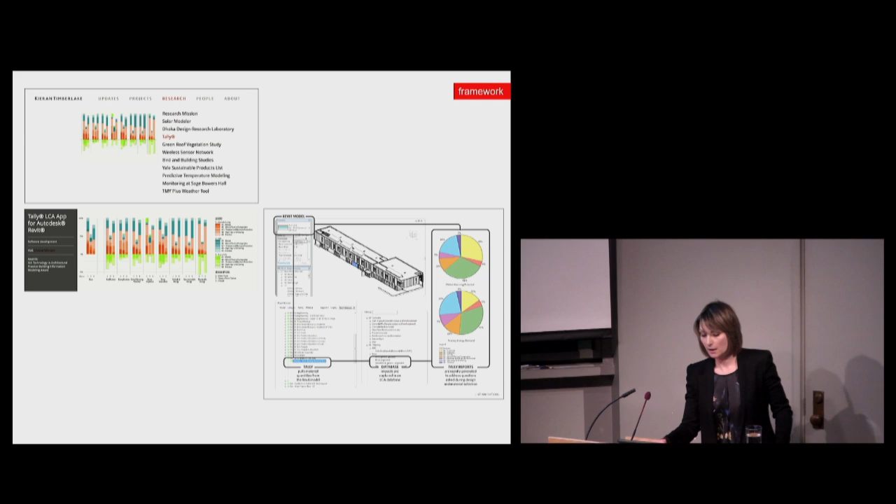And these are the kind of questions that they are taking on as a professional practice, in which, for example, they've designed a life cycle assessment tool titled Tally, which quantifies embodied energy along with other environmental impacts and emissions to land, air, and water. And with a number of scientists and ecologists on staff, the office also revisits many of their constructed projects to document plant succession and compare the original plant composition and how it has evolved and changed over time.

Other projects that I've looked at, for instance, at UBC, which have a campus-wide sustainability mandate, look at interdepartmental research collaboratives with partnerships across private and public sectors to monitor environmental performance, with a physical building functioning as a living lab to test environmental and social performance in situ. And mind you, this building has integrated about 3,000 sensors in it.

So for instance, one of the research areas among several others is intended to characterize the pervasive difference between design intention and actual performance with high-performance sustainable buildings. And within each research area, an interdisciplinary team brings a range of perspectives to assessing complex systems.

So as the architectural disciplines embrace more evidence-based strategies, I believe that design professionals and academics now have the responsibility to engage in performative research and to contribute directly to the development and optimization of environmental technologies. We need to focus particularly on how these new technologies actually work and how they inform the design process.

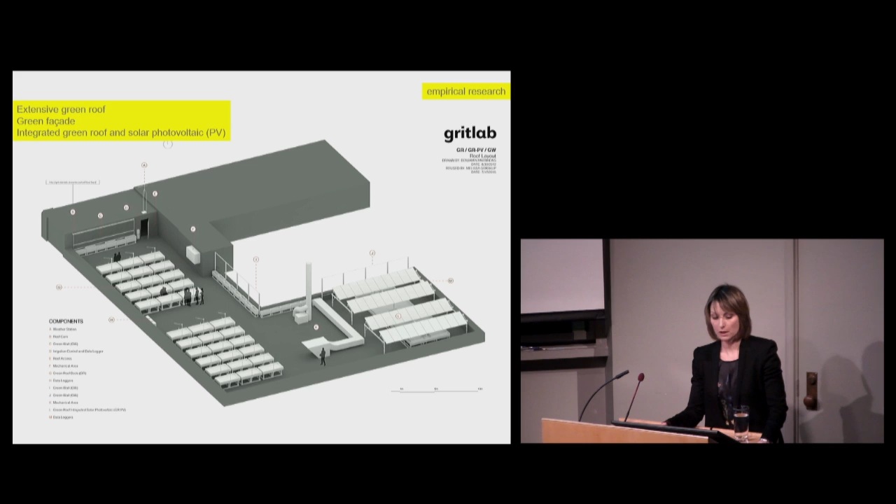Our current setup is actually on the 5th floor of this building. It includes an extensive green roof research, 33 test beds, a green facade research, and also an integrated green roof and solar photovoltaic experiment. The extensive green roof research began in 2011 and looks at 4 performance criteria. We're looking at stormwater management, thermal cooling, plant growth biodiversity, and species habitat.

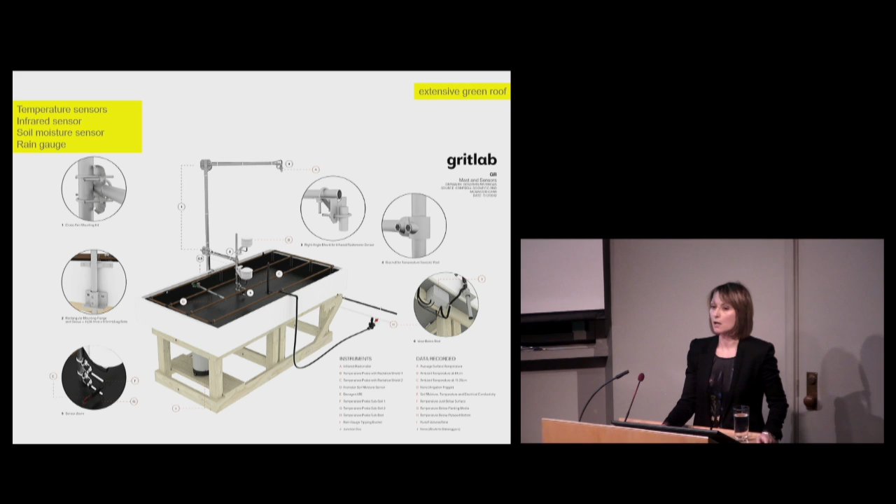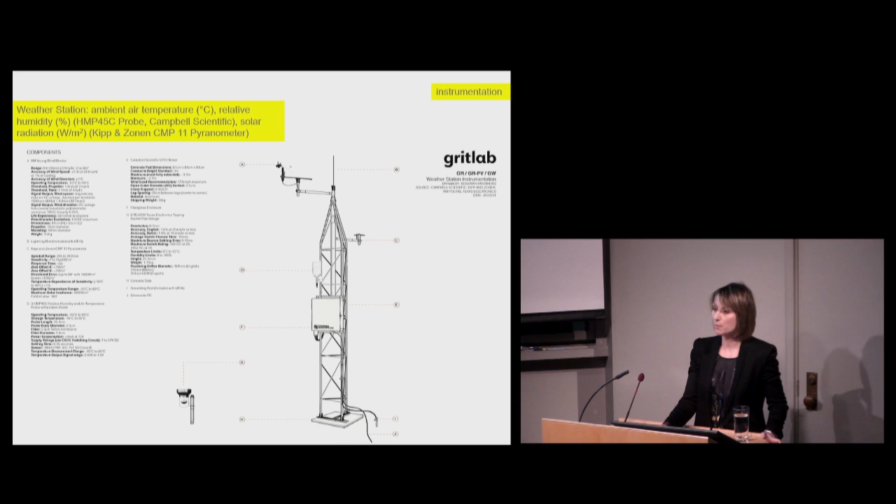Each bed is equipped with a number of different sensors that could measure temperature, soil moisture, and runoff. And the results from each bed are then compared to climate conditions that we record via the weather station: solar, precipitation, humidity, wind speed, and so on.

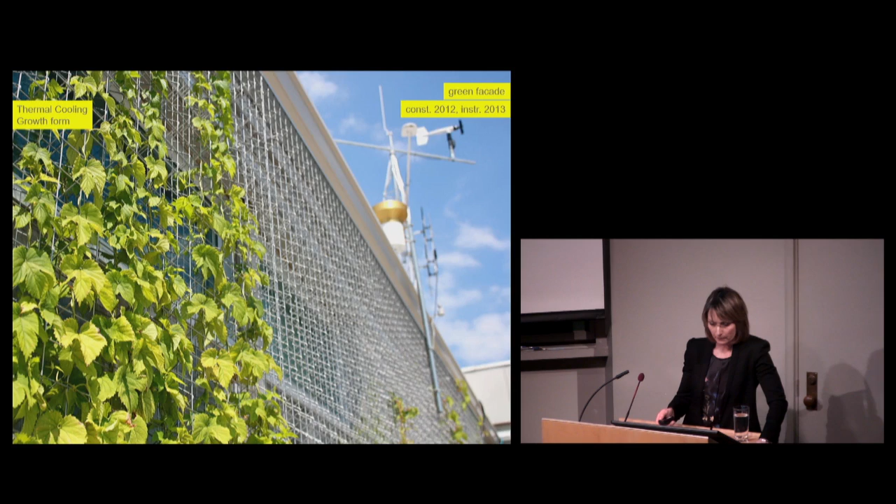The next research area that we focus on is green facades, and in particular, we look at the thermal cooling potential of green facades on building envelopes. And actually, here you can see our weather station. And in this picture, you can see the surface temperature sensors that are mounted to the surface of the building, comparing vegetated surfaces and control non-vegetated surfaces, and looking at the thermal cooling potential of vining plants on the facade.

And our most recent setup looks at the combination of green roofs and solar photovoltaics, with the questions about the effect of temperature and cooling via plants and evapotranspiration on energy production. We also are looking at the effects of shading on plant growth and the combination of energy and stormwater management,

thus providing a new research or implementation potential in the field, looking at 2 industries that are currently competing for the same roof area, and looking at whether they have the potential to actually be combined together and work in synergy.

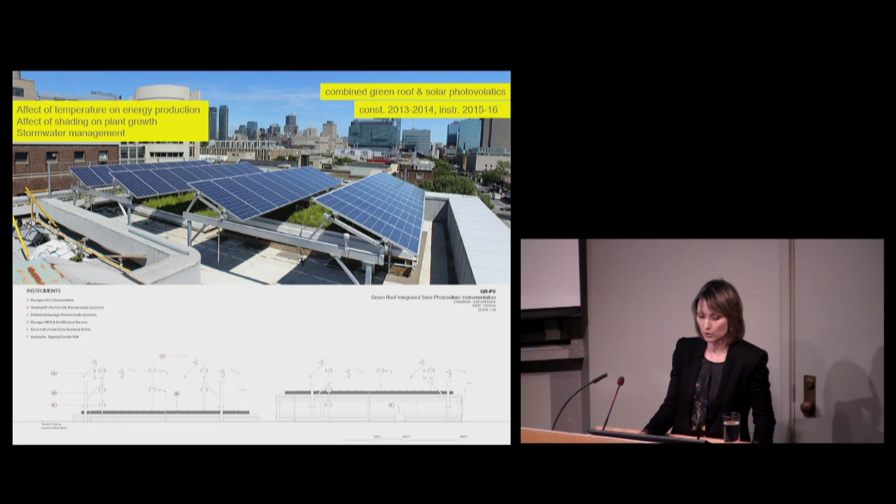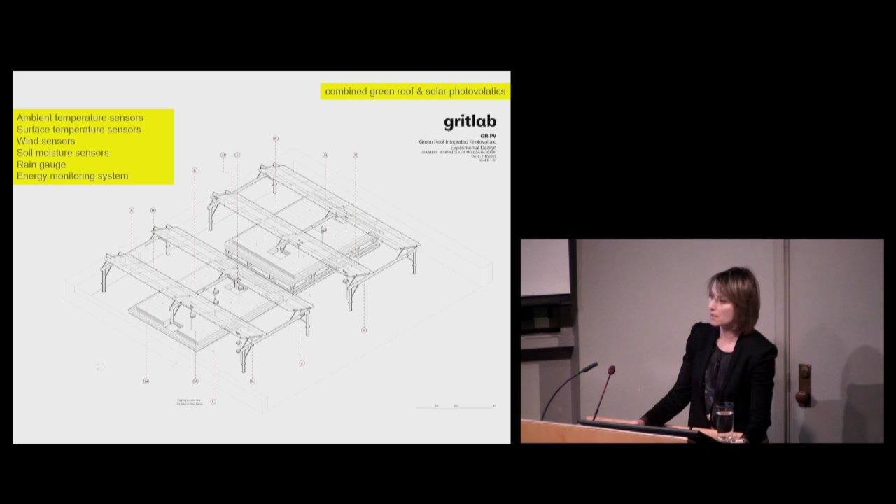The setup is also equipped with a number of different sensors recording ambient temperature, surface temperature of the PVs, wind sensors to look at microclimate conditions around the setup, soil moisture sensors, rain gauges to look at runoff quantities, as well as an energy monitoring system to look at energy production. And overall, this is what our data acquisition system looks at, with over 500 sensors and data loggers recording data every 5 minutes.

In terms of our interdisciplinary research, we are looking to understand complex systems from a number of different perspectives concurrently, identify the overlap, synergies, as well as contradictions in order to offer a more precise and nuanced approach to design and implementation, compare and learn from distinct disciplinary perspectives, priorities, and research methods.

And so our research team unites the fields of landscape architecture, building science, environmental engineering, and biology, with a number of different expertise, ranging from plant ecology to urban bees to low impact development, subsurface hydrology, and so on.

Partnerships for us are extremely important. We look at the GRIT Lab as a mediator between researchers, designers, manufacturers, and policy legislators. We partner with industry and government to really understand what are the kind of practical concerns and implications in the field and make sure to align them with our research objectives. We then communicate research findings and recommendations to scholars, design professionals, industry, and policy decision makers to improve standards.

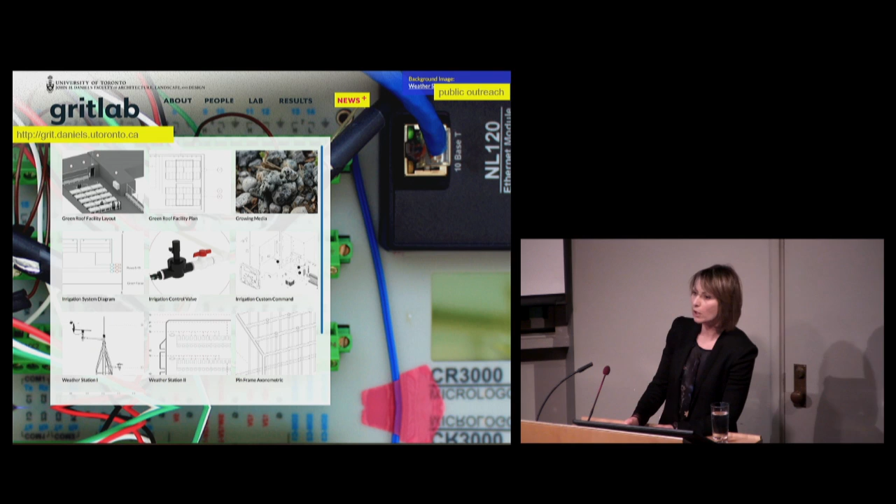And our last objective is really to look at this as a kind of model for demonstration, for public outreach. Usually during the summers, we host a number of different tours. For instance, last year we hosted Doors Open Toronto with over 200 people who visited us. We also make all of our drawings and findings and publications available online.

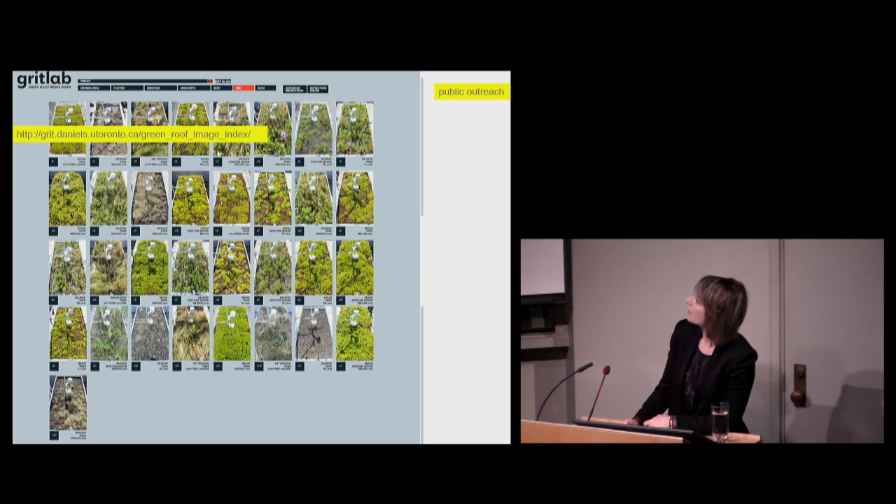And we have a new tool that we have developed which actually shows the green roof beds in comparison to one another and in relationship to various testing variables where you can look at how they've changed over time and over the duration of the study. So far it's been 5 years, and that's available online.

So what I'd like to do is share with you our preliminary green roof research findings. First, a bit of background on how the experiment was set up and why. As you may know, Toronto launched its green roof bylaw in 2009, which mandates the construction of extensive green roofs, which are of depth up to 15 centimeters, on all new residential, commercial, and industrial construction with a minimum square footage of 2,000 square meters.

And along with that bylaw comes a construction standard that makes certain requirements and recommendations with respect to the construction of extensive green roofs. In this study, we've looked at 4 particular design variables. We're examining the growing media composition, with a current recommendation that follows the German FLL guidelines. We're also looking at the growing media depth, which is a requirement of a minimum of 10 centimeters. We're looking at irrigation and also planting as the variables.

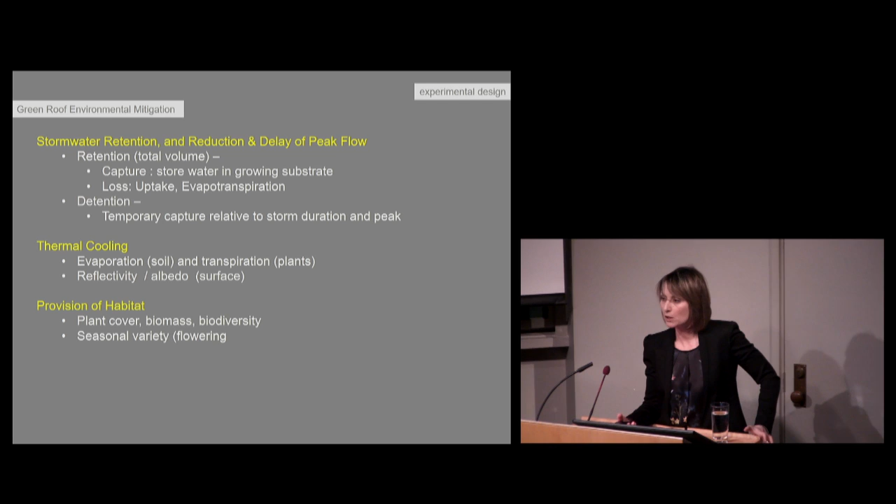The other performance has to do with thermal cooling, where we have evaporation through the soil and transpiration through the plants, and also the surface of the plants provides a more reflective surface than, let's say, conventional blacktop roofs. And the third is the provision of habitat, looking at the increasing loss of vegetated areas in urban areas. Green roofs provide plant cover and biodiversity, as well as seasonal variety and potential for species habitat.

So the experimental setup looks like this. We're looking at 3 performance criteria, 4 design variables, and the alternatives are the FLL compliant, which is the recommendation from the city, and an alternative, which is a biologically derived or compost-based growing media with a high organic content. The growing media depth is 10 centimeters, which is the requirement. 15 centimeters is the top range of extensive green roofs, and so we want to look at whether that additional depth will increase performance.

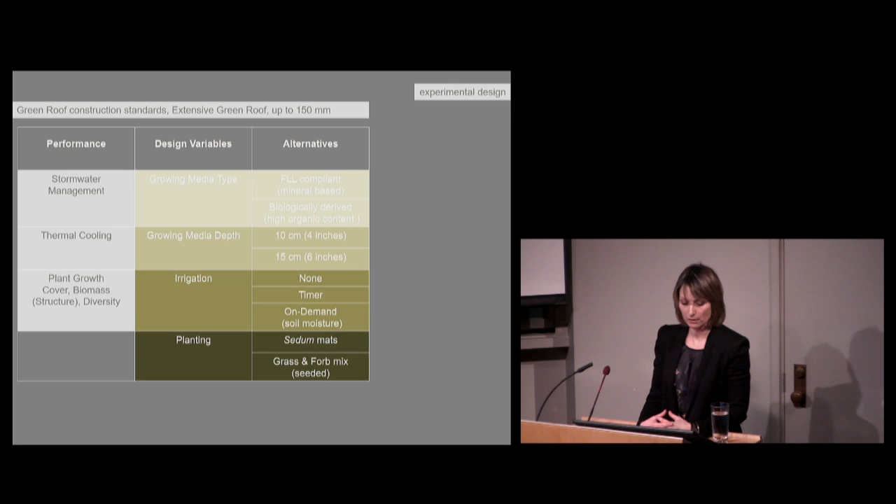Irrigation, the 2 main practices are no irrigation and timed or daily irrigation, and we're looking at a third option, which is a soil moisture sensor activated irrigation. And then with respect to planting, the go-to plant and the recommendation also from the city are sedum mats, and here we're looking at an alternative of grass and flowering plants mix.

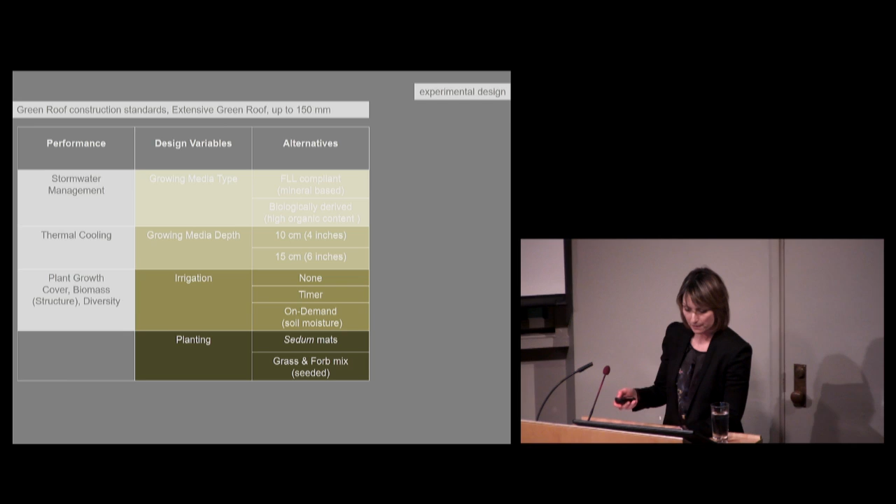Now, why these particular alternative comparisons? The industry practices in Southern Ontario divide into 2 camps, particularly with respect to the subject of organic content in growing media. Those who state that organics will biodegrade, lose porosity, and become waterlogged. And those who disagree with these claims and instead maintain that a higher percentage of organics supports a range of vascular plants such as grasses and forbs, as well as sedum, while also providing higher water retention capacity.

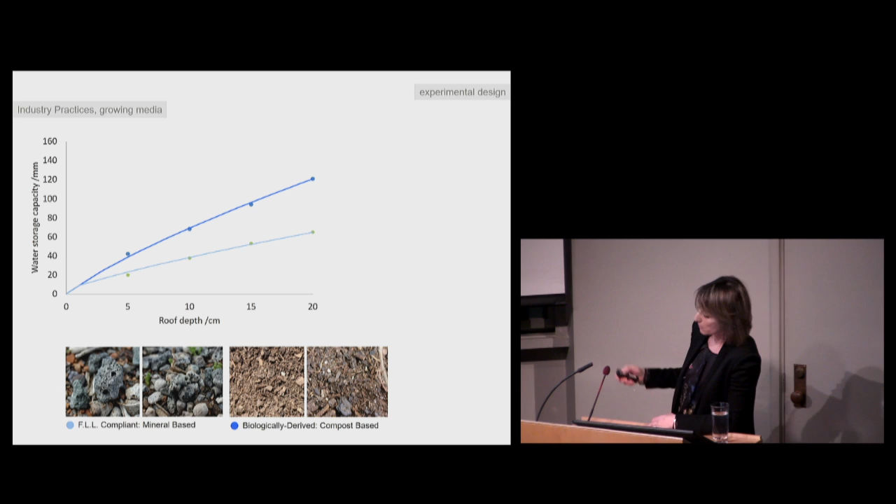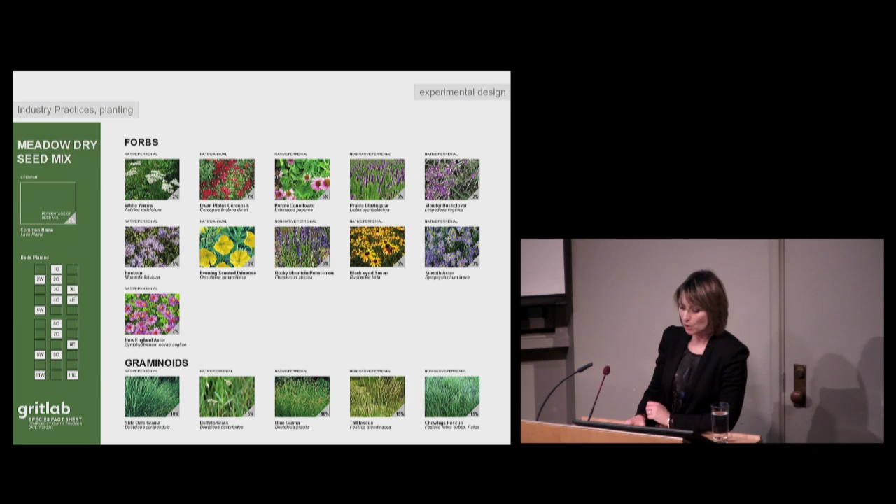The meadow mix, we dubbed it the meadow mix, was selected based on success on other green roof projects in the city, and consists of 16 perennial and annual meadow grasses and forbs that are native to southern Ontario. The mix, which was sown on site, contains bunch grasses, sod forming, and tall grasses, as well as creeping forbs and tall forbs.

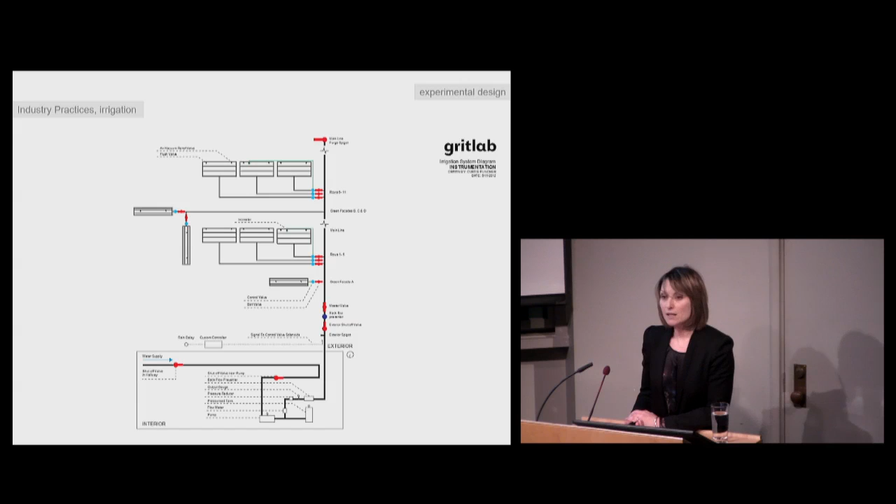There are also two opposing opinions and practices concerning irrigation. Some projects employ supplemental irrigation to support the growth and survival of plants and to prevent desiccation and potential fire. On the other hand, LEED gives points for projects that do not use potable water for irrigation, and so many projects can be found to have no irrigation system in place. Of course, irrigation also becomes a cost issue. To date, no studies have examined the potential use of soil moisture activated irrigation as a means to balance water availability for plants and water conservation.

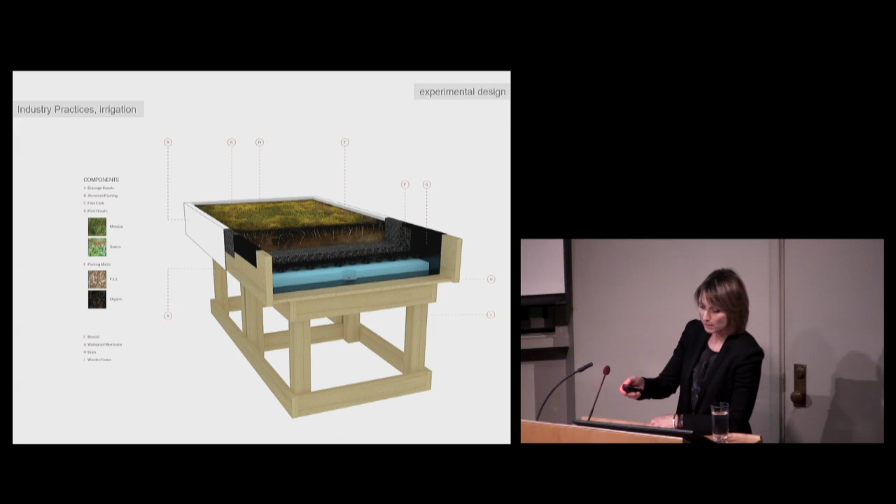So as mentioned earlier, our experimental setup consists of 33 test modules in a randomized layout. Each testing module, roughly 4 by 8 feet, consists of a waterproof membrane, a drainage layer, a geotextile filter, planting media, and vegetation, which essentially emulates a typical construction of a green roof. And in our case, the modules are suspended off the roof deck to accommodate for various sensor instrumentation, particularly runoff capture.

So I'd like to share with you a few of our research findings to date. The first is a study which was led by our biology coordinator, Scott MacIvor, and took place between 2011 and 2012, and focused on correlating plant growth, meaning cover and diversity, with respect to the growing conditions, namely the growing media and irrigation.

The vegetative cover measured by percent cover is a commonly used measure of green roofs when investigating performance. And as mentioned, the City of Toronto requires an 80% cover within the first 2 years.

And as mentioned, sedum species have been studied at great length in various climate regions, while grasses and forbs to a lesser extent. And since many non-sedum plants are being tested and specified in North American extensive roofs, there is an increasing interest in augmenting the organic content of extensive green roof growing media to support a broader range of vascular plants.

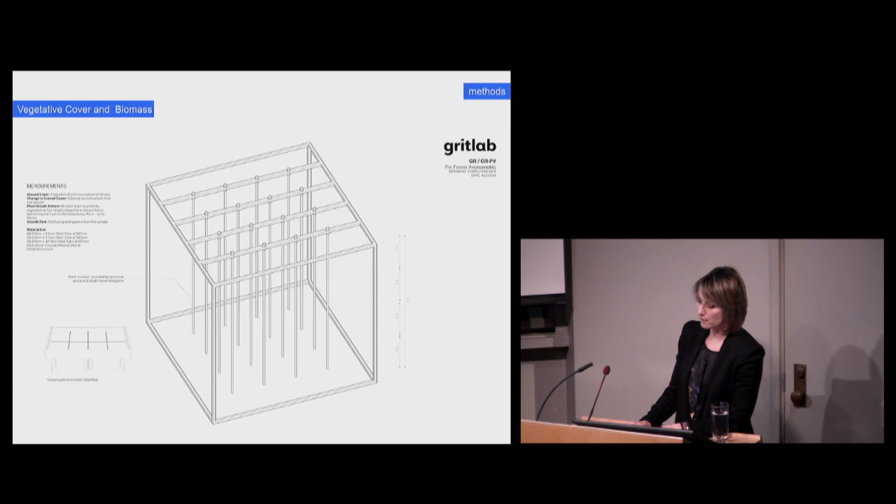So to collect vegetative cover data, we use a point intercept method with a pin frame to quantify the proportion of pins touched out of 16 in total. And then in the meadow mix, plant diversity was measured by haphazardly setting a 30 by 30 centimeter square sampling frame in each module, then counting species richness and abundance, from which a species diversity index was calculated.

For the sedum, however, we looked at growth form differences between the cultivars: those with broad leaf, sedum spurium, for instance, cylindrical leaf, sedum album, or rigid leaf, such as sedum acre.

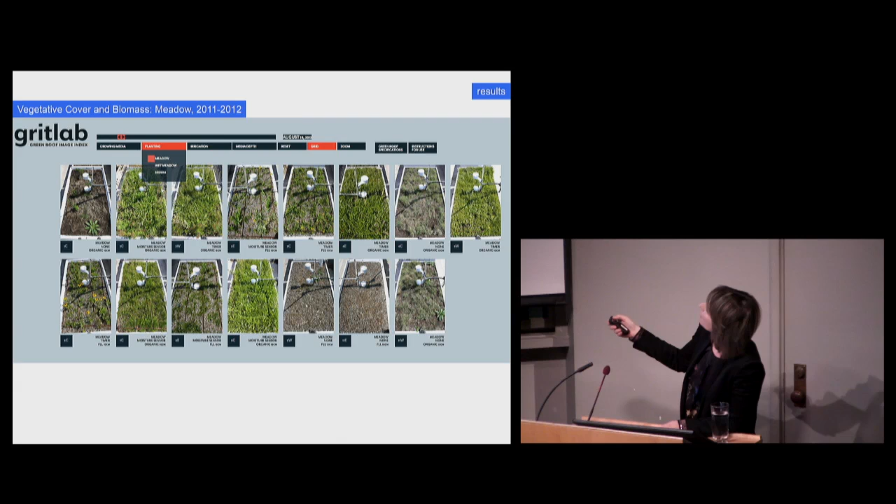In the grass forb plant combination, modules with organic growing media had significantly greater vegetation cover than the FLL base module. And here I'm using our green roof image index to show some of those differences side by side, where these are some of the FLL mixtures. These are the organic media. And this is, again, with respect to the grass and forb mix. Those that have the more sparse vegetation have no irrigation.

So in the FLL media, having no irrigation resulted in considerably less cover than all combinations, and you can see that drop right here in the second summer around July. Above ground biomass was also significantly greater in organic-based growing media in both grasses and forbs compared with the FLL-based growing media after 2 growing seasons.

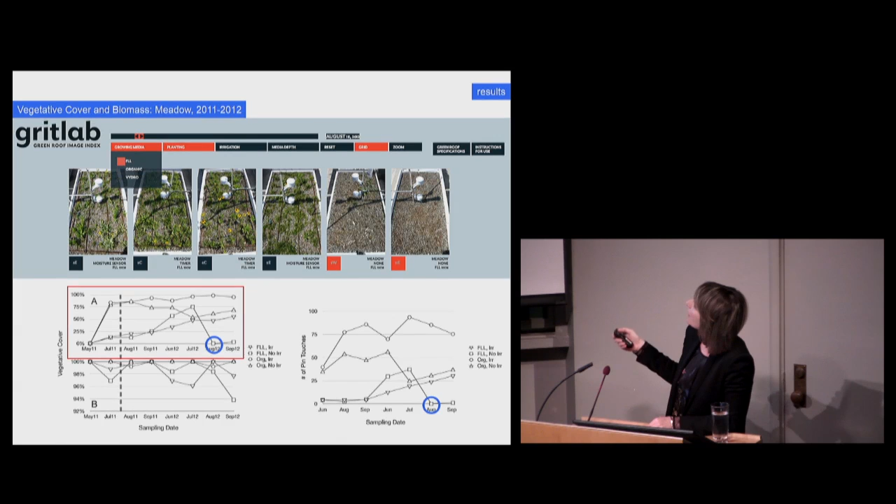And no significant effect of supplemental irrigation was recorded despite above ground biomass being less in non-irrigated modules, especially in FLL growing media. And lastly, declining cover was anticipated to follow in successive years. So you can see here from the images the FLL media with the meadow planting, with the FLL and no irrigation being the worst combination.

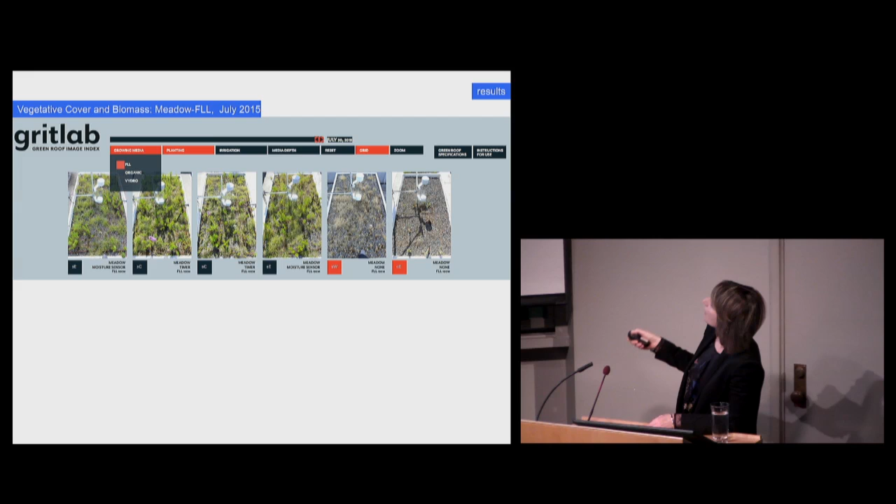And this was an image by sliding the scale to actually this summer, July 2015, to see whether our assumption was correct about declining cover. And in fact, the results are quite the same. And conversely, this is an image from the same date, July 2015, looking at the organic media with relationship to the grass and meadow combination, and showing how the cover was much greater than in the FLL media, with the exception of some cases where irrigation is not employed.

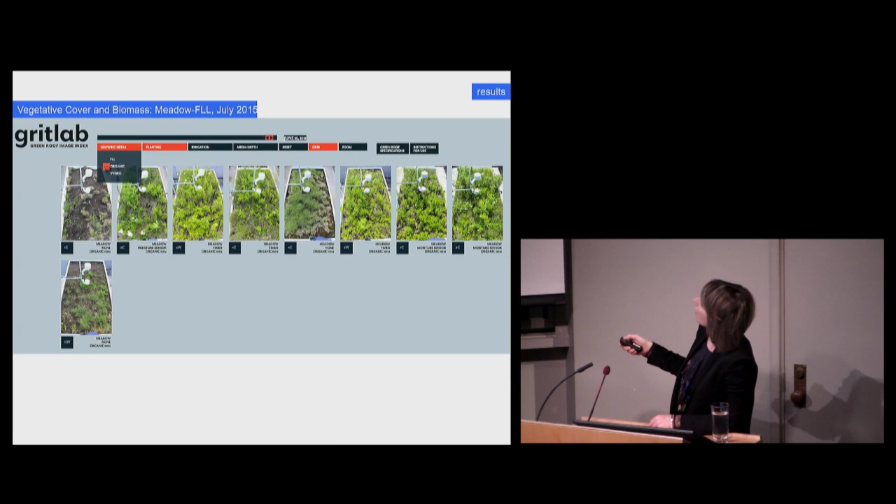So supplemental irrigation had a significantly positive effect on plant species diversity in both FLL and organic-based growing media, but no difference between the 2 treatments of irrigation, the timed irrigation and the soil moisture sensor irrigation. So when irrigated, both the FLL and organic growing media treatments were similarly species rich by the end of the 2nd growing season, but plants were larger and more abundant in the organic-based treatment. And these images above show both the organic beds on the left here and on the right with no irrigation, and the FLL in the middle.

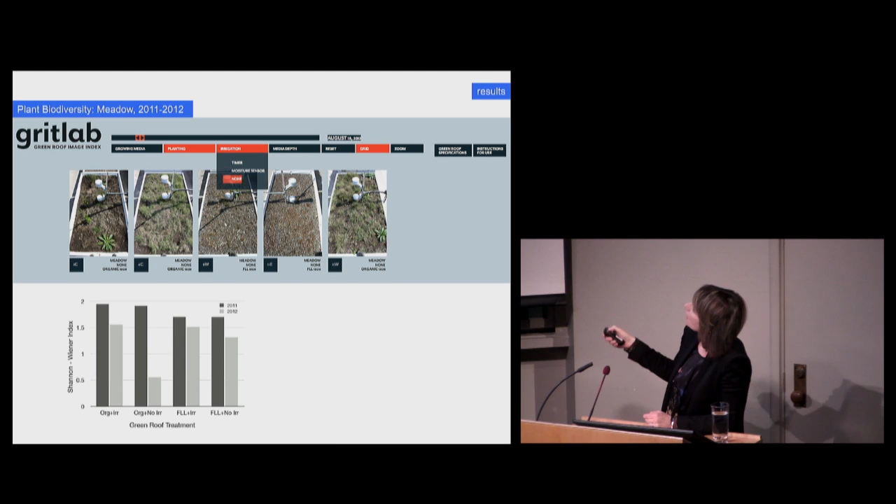So with no irrigation, all meadow plant species in August and September, except for 2 warm season grasses, Bouteloua curtipendula and Bouteloua gracilis, and to a lesser extent Festuca rubra, essentially died or disappeared. And in fact, the perennial grasses that remained are typically recommended for green roof installation due to their drought tolerance. But as you can see here, the species diversity dropped quite a bit. We are not seeing any of the flowering plants, and we're left with essentially a couple of different grass species.

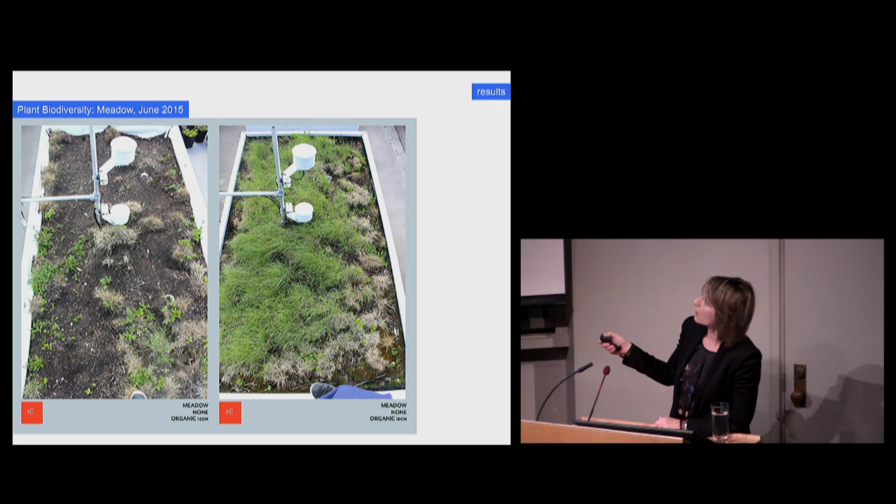Fast forwarding to 2015, we're seeing that not only is the plant cover and diversity the same as in 2012, but what we're also seeing is that the loss of vegetative cover and root mass results in erosion and loss of soil due to wind scour.

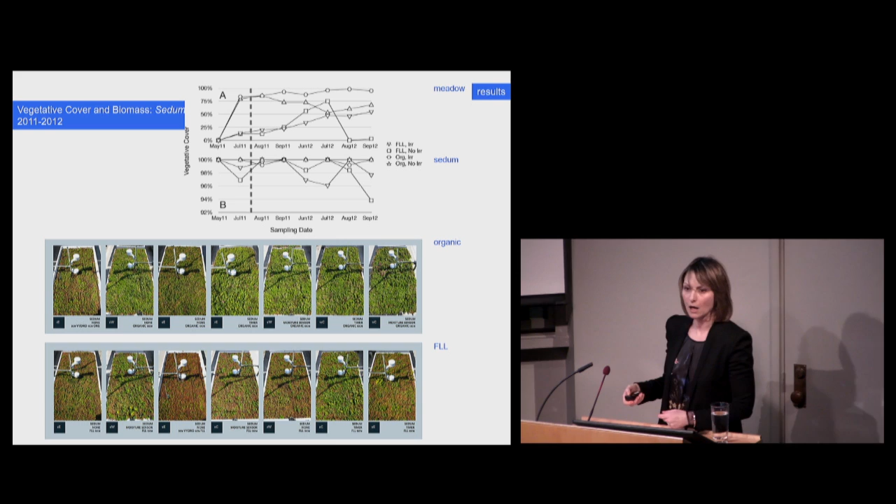The sedum plant modules exhibited very little change in cover as a result of growing media type or supplemental irrigation regime. So if you compare the drop from 100 to 0% in the meadow, where in some beds we actually reached 0% cover, the sedum pretty much remains within the top 90% of cover, which is within the requirements of the City of Toronto Green Roof Standard.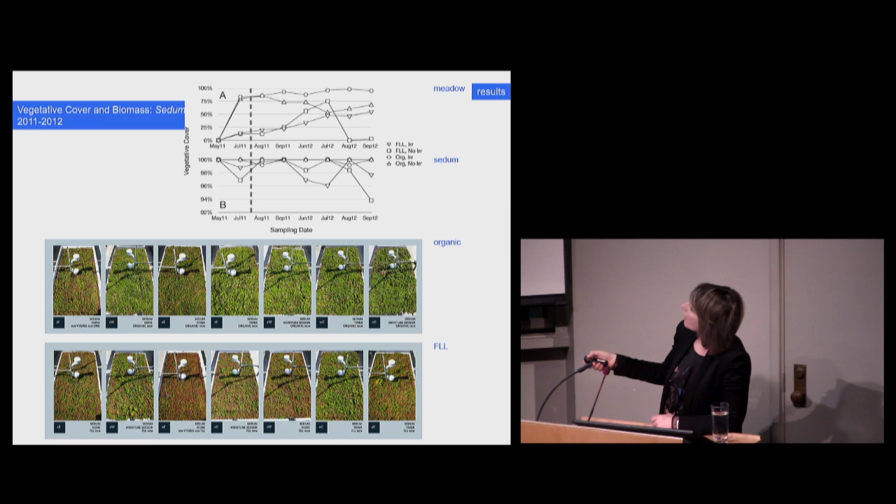However, biomass was significantly less in the FLL modules, and you can note the difference. It's hard to see from an aerial image, but in some of the modules that have no irrigation, particularly with the FLL mix, the biomass decreased.

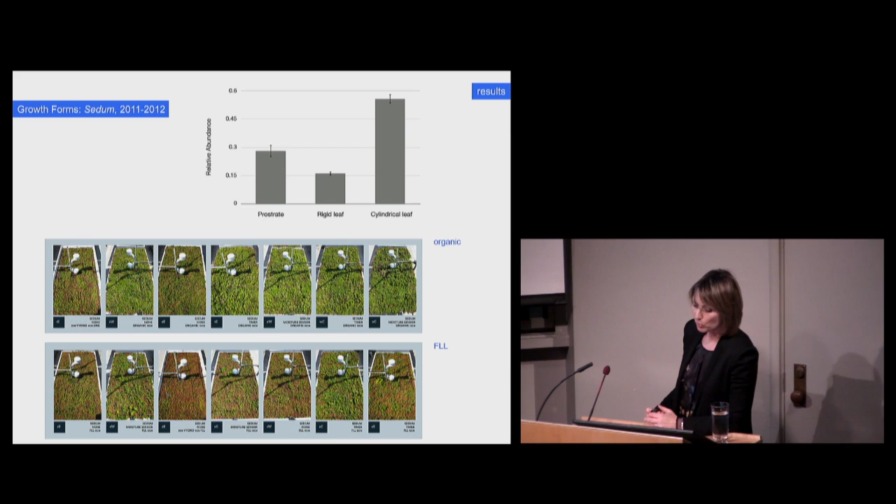Moreover, the assemblage of sedum morphotypes, as I mentioned, the broadleaf, rigid leaf, and cylindrical leaf, did shift over the course of the 2 years. The broadleaf sedum species were significantly more abundant in organic media, and you can see that with the green color, while cylindrical leaf sedum were significantly more abundant in the FLL media.

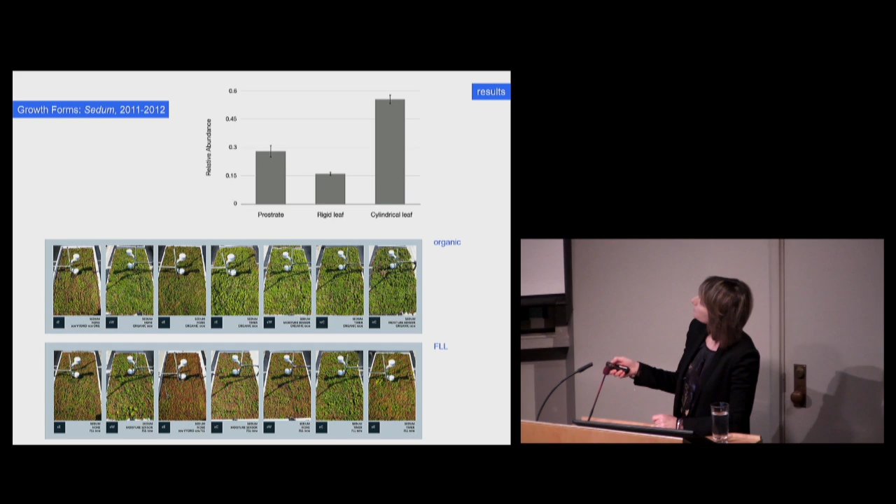So over the years, we've observed that although sedum maintains a very high cover, biomass and cultivar types decrease when planted in FLL media. This is taken from July 2015, showing how vegetation has evolved over time, and you can note some of the patchiness that begins to occur with the FLL media, particularly with no irrigation, as opposed to the organic media, regardless of irrigation.

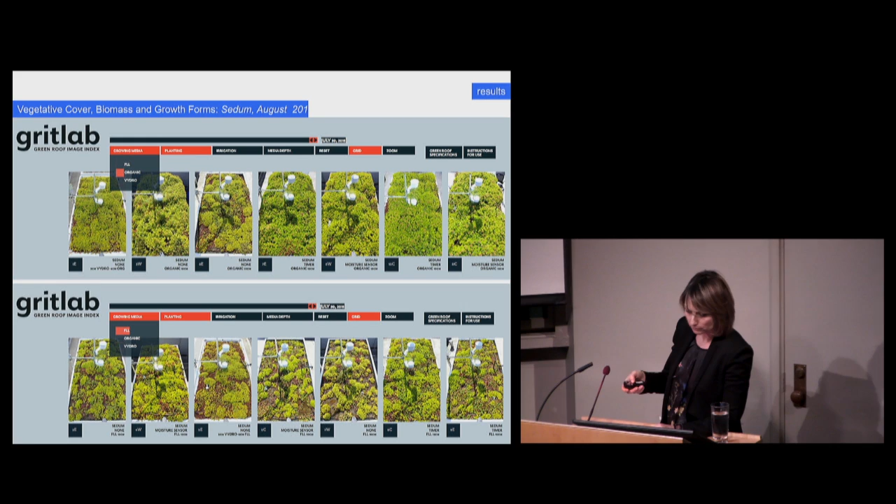I should also mention that this study confirms and quantifies the observations by green roof growers in Toronto. And finally, several studies have demonstrated that combining both sedum and non-sedum plants rather than focusing on one or the other, which our study currently looks at, is likely to improve green roof performance, and this could be one of the research directions that we would pursue.

So overall, the conclusions from this study are that plant cover and above ground biomass in meadow and sedum green roofs is significantly less after 2 years when industry standard FLL growing media are specified. Meadow planting diversity is unaffected by growing media, but highly dependent on supplemental irrigation. Different sedum growth forms dominate depending on growing media specifications, and overall growing media and irrigation impact vegetative assemblages differently and somewhat independently.

The second study that we just completed looks at the thermal performance of green roofs and the relative influence of 4 design variables on thermal cooling. This study was also led by Scott McIver. As in the previous study, we looked at vegetative cover structure sampling using the pin frame, and we did those over the 2 years with 13 different sampling times.

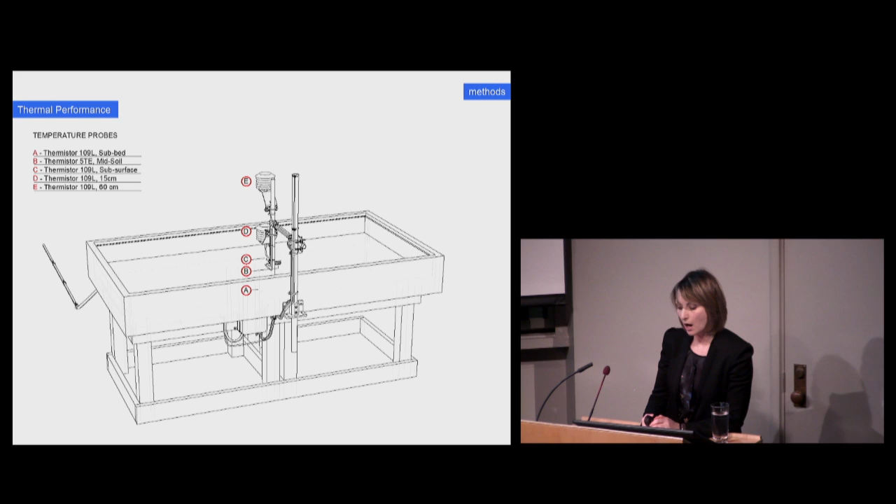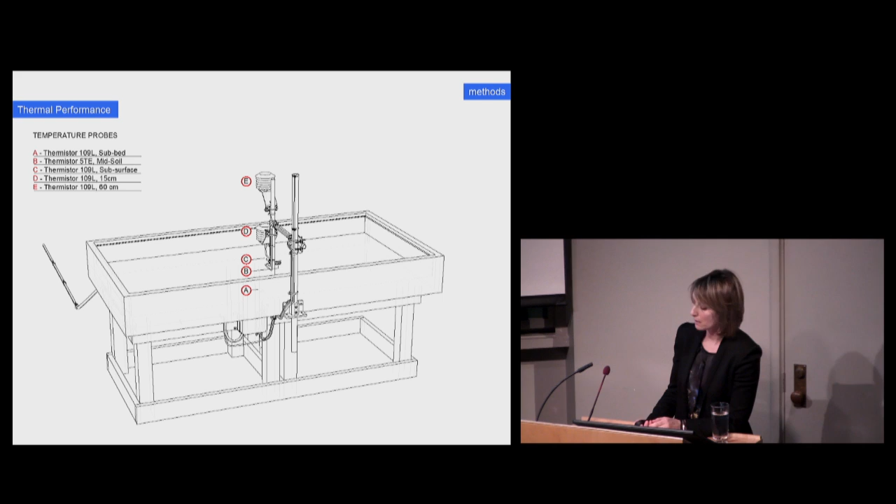To measure the thermal data, 5 sensors were installed along a vertical center axis to generate a thermal profile for each module. There was one underneath the bed, one at the base of the growing media, one just at the surface of the growing media, 6 inches above the growing media, and 60 centimeters above the growing media. The temperature was then subset by daylight hours only, and the mean, max, and minimum were determined for each day of the sampling week, then compared to one another.

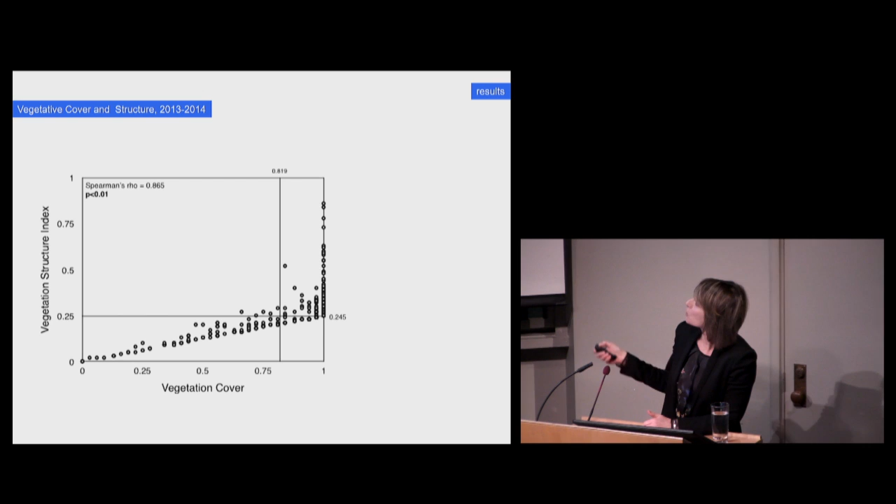Overall, plant cover and structure were significantly correlated, and you can see here beds that had a lot of cover also showed a lot of structure or height. Modules with greatest vegetation cover included sedum planting and organic soil, with irrigation having no effect. So you can see here irrigation not really playing a role, but the best performer is the organic and sedum. This bed has the FLL and no irrigation, and this one has the organic and timed or daily irrigation.

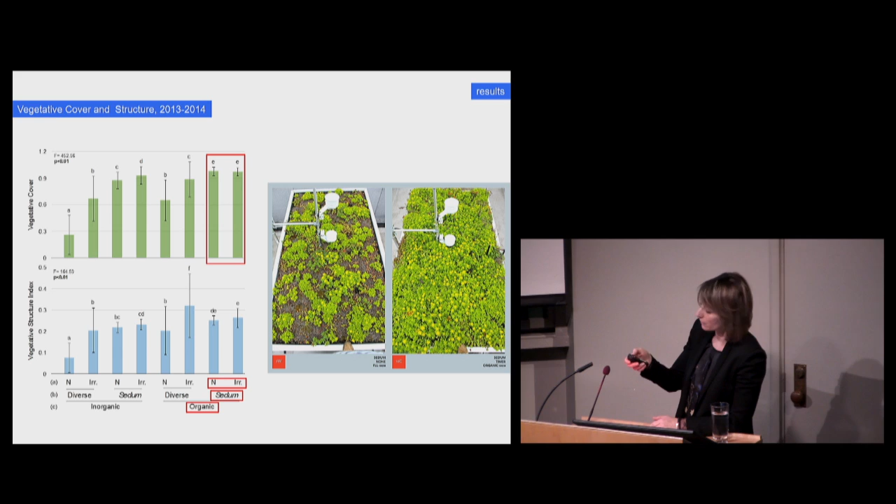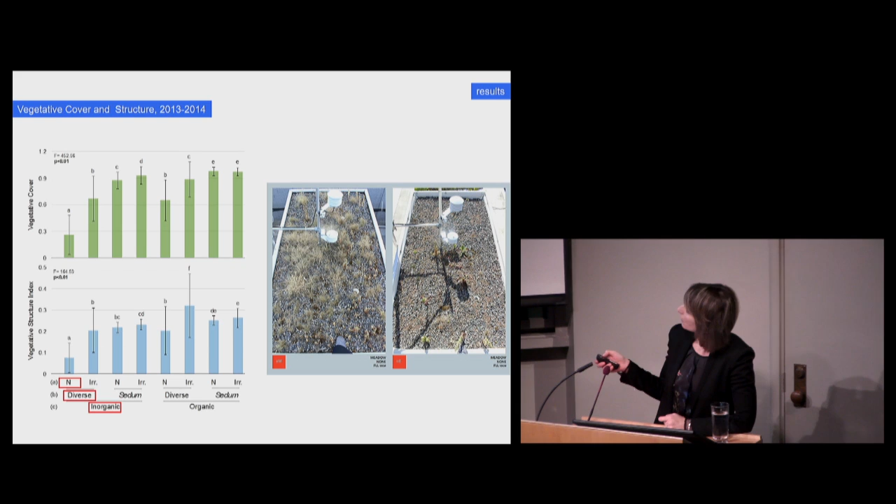Irrigated meadow planting in organic substrate had significantly higher vegetation structure, as you can see from this diagram. And just like in the first study, the effect of irrigation was most notable in the meadow mixture, which suffered a 2.6 times decrease in cover and 2.7 times decrease in structure in the FLL mix. The effects were less pronounced in the organic substrate, with meadow mix declining in structure and cover by only 1.4 and 1.6 times without irrigation. And cover and structure in sedum planting was unaffected by irrigation.

So our analysis shows that there were significant differences in temperature recorded at all sensor heights among the green roof modules. We found an average of 2-degree difference at sensor C, which is right at the surface of the planting bed, and a 1.5 difference at sensor D, 15 centimeters above the planting bed.

And those are differences between the hottest treatment combinations, which are meadow, FLL with no irrigation, shown on the right, and the coolest combination, sedum, organic, and irrigation. Now, those were the averages, the 2 and the 1.5, but the maximum temperatures reach a difference of 8 degrees between the hottest and the coolest in level C, and 5 degrees between the hottest and the coolest in level D.

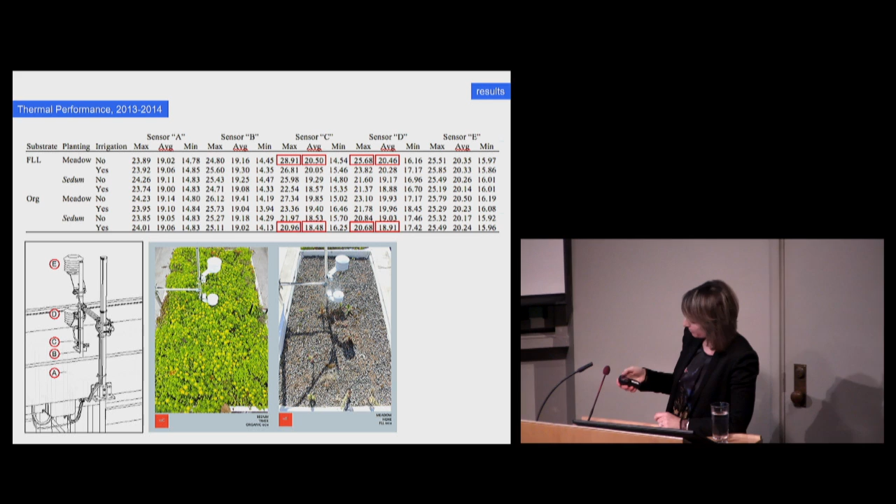So the greatest effect size among all variables came from planting type, where sedum outperformed the meadow species. However, one exception was that irrigated meadow in organic media performed as well as unirrigated sedum in FLL media.

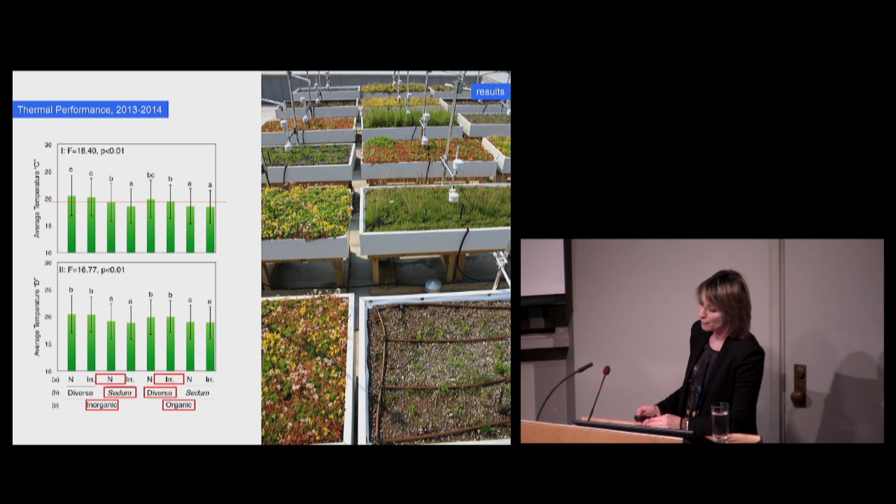So in conclusion, for this study, the modules receiving supplemental irrigation had roof temperatures that were significantly cooler than non-irrigated modules. Plant structure, not cover, was greater in meadow planting than sedum over 4 years. Roof cooling is not significantly reduced with plant structure. Cover is more important. Roof is cooled more with sedum than with meadow planting, regardless of growing media and irrigation. And the top performing combination included irrigated sedum planted in either depth in the organic substrate.

Now, determining the cooling potentials of individual plants and of different species could help develop models for planning super-cooling green roof plant communities. In other words, in our study, we looked at the plants as a community and not as individual plants. So, for instance, some studies have found that lamb's ear outperforms sedum in cooling due to its reflective white hairs that dissipate solar radiation, which means that there's potential to look at individual plants as

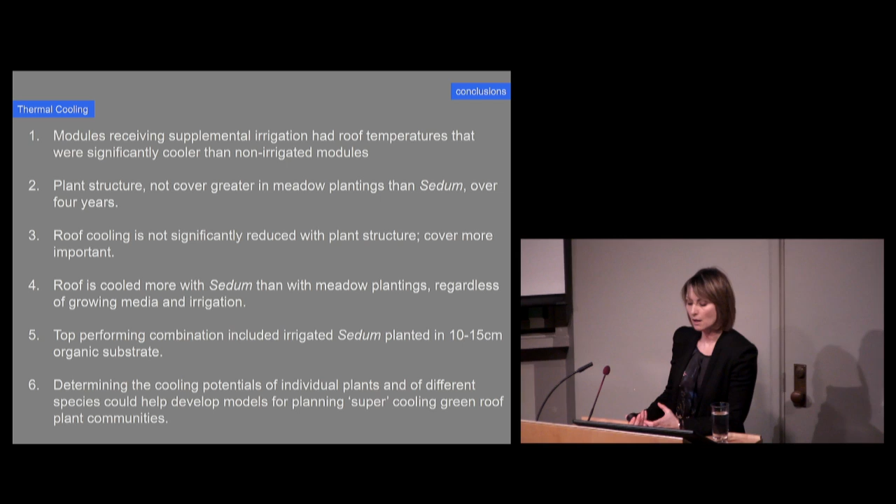high-performing cooling plants. And again, in this study, it is important to mention that we're looking at these two planting communities in isolation, but the potential of actually mixing sedum and meadow planting also offers a viable solution.

The last study that I'll share with you, which is currently in preparation, was led by Jenny Hill, a PhD candidate in civil engineering, and focuses on stormwater management, volumetric runoff calculations, and peak runoff coefficients. The study analyzes 176 storms between 2013 and 2014, where 2013 was a much wetter year, which certainly plays a role in the overall analysis.

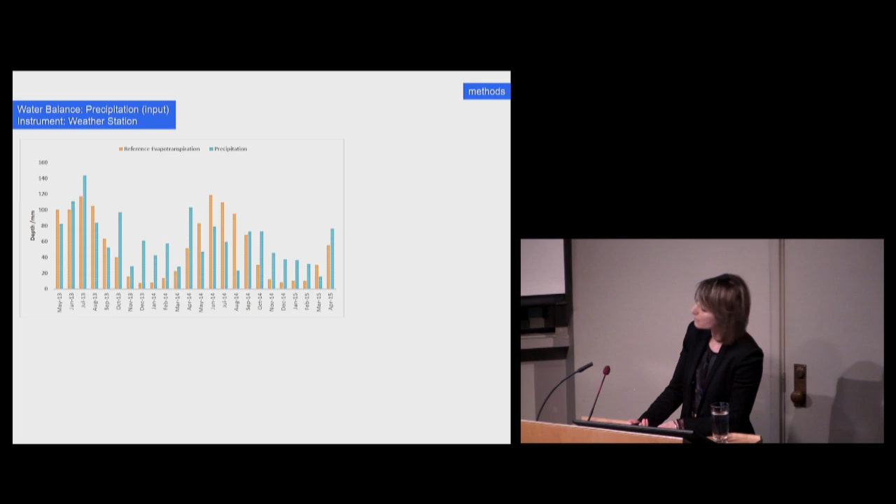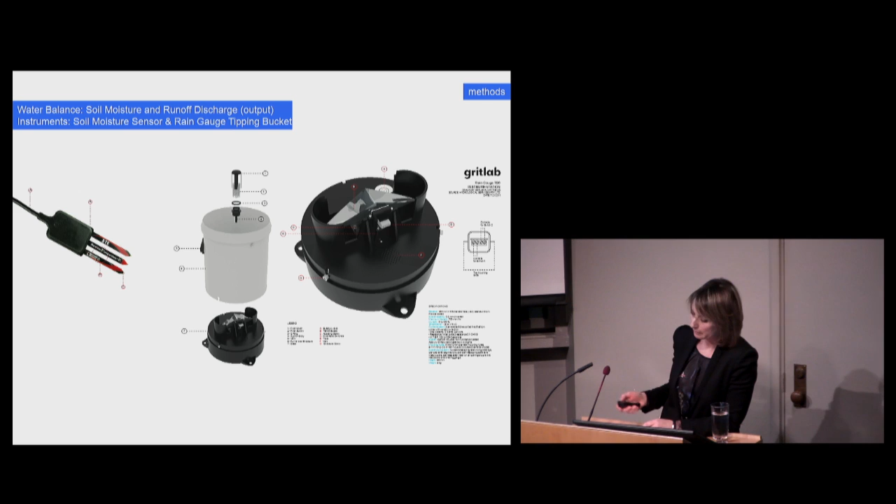Precipitation was recorded via our weather station on site. Now, the growing media moisture content was recorded with a soil moisture sensor, seen on the left, and runoff or discharge from each test bed was measured with a rain gauge or tipping bucket. It is important to note that in 2013, the beds that were irrigated received 5 minutes of irrigation daily, and in 2014, this was reduced to 2 minutes per day. And this is the irrigation system that we have, a standard drip irrigation system.

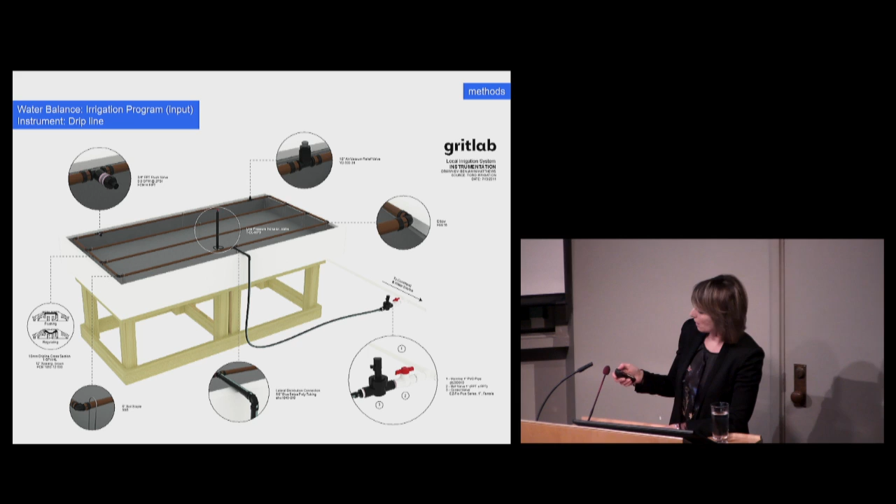And the last variable in the water balance and in the study that we have also integrates an on-demand option, which is instrumented with a soil moisture sensor to control irrigation based on the level of soil moisture in the soil.

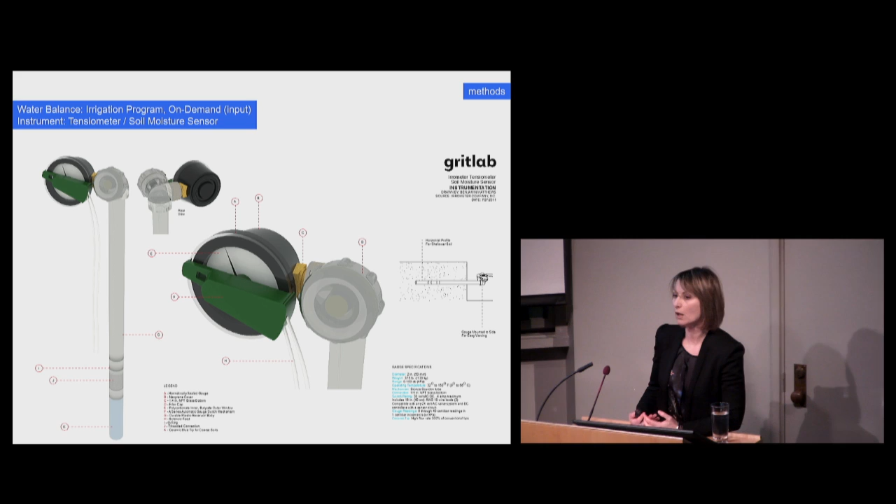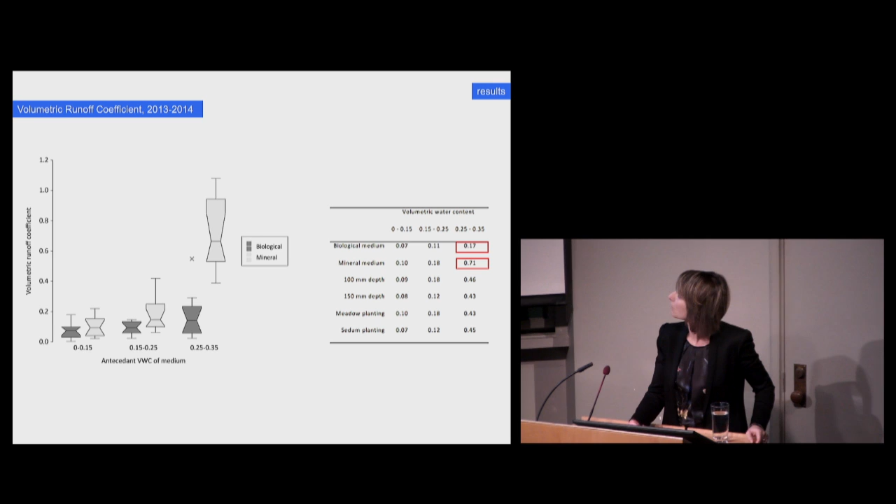And although plant cover did not play a significant role, among the 2 plants, the sedum species outperformed the meadow. One possible explanation for this is the function of interception of precipitation. In other words, the cup-like leaves and waxy surface of the sedum canopy capture the rain, which in turn evaporates directly off of the surface as opposed to infiltrating the soil and cycling through the soil and the plants via evaporation and transpiration.

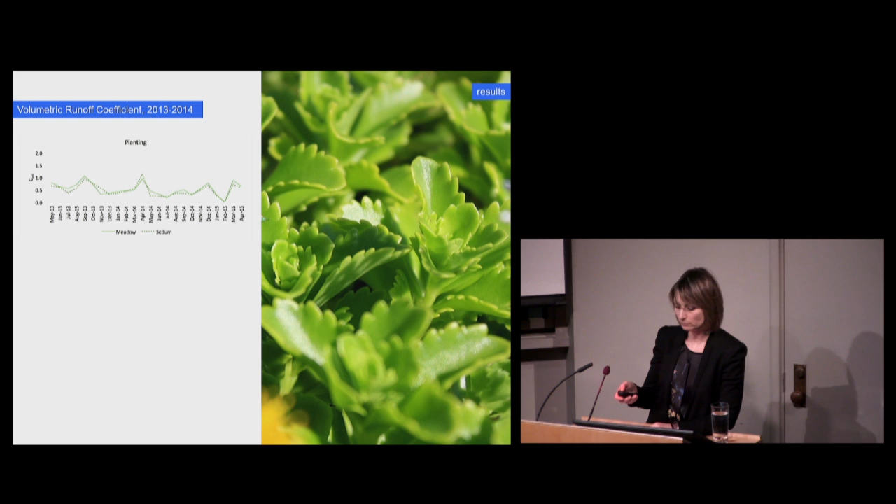Now, another critical finding in this study is a dramatic difference between the peak runoff coefficient that is currently locally practiced, which is 0.5 or 50% retention, referred to as pre-development state, versus the peak runoff coefficient that was calculated in this study, 0.1 to 0.15 or 85 to 90% retention. The former is based on the FLL guidelines and the latter is based on empirical data that was derived in this study. So 2 critical points follow from this.

First, with this new recommended runoff coefficient, a minimum coverage of 60% of the building footprint with an extensive green roof would improve stormwater capture beyond the pre-development state and would require no other management infrastructure such as cisterns or any other infrastructure on site, thus reducing construction costs and freeing up valuable land for other usages.

Secondly, the Toronto Green Roof bylaw currently requires only a minimum of 20% coverage, which means that the developments that meet this minimum requirement would fail to capitalize on the runoff reduction potential of an extensive green roof and would require additional stormwater management infrastructure on site.

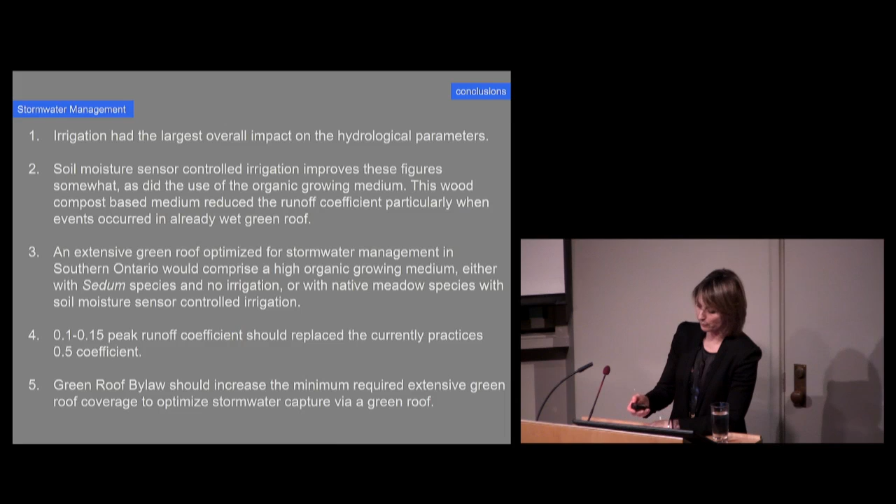Now, in this discussion, what I'd like to do is look at how the three different studies perhaps overlap and come together, and what kind of conclusion we can draw from some overlaps between those studies and where those studies diverge. Overall, organic growing media has been shown to outperform the FLL for stormwater management, thermal cooling, and plant growth, particularly for meadow mix.

Irrigation was the most significant factor for all three performance criteria, but in opposing ways. On-demand irrigation using a soil moisture sensor proves to be a good compromise, particularly when used in combination with organic media, which has a higher water retention capacity. Sedum species certainly proved to be a top performer for both stormwater management and thermal cooling. And we believe that leaf interception may be at play here.

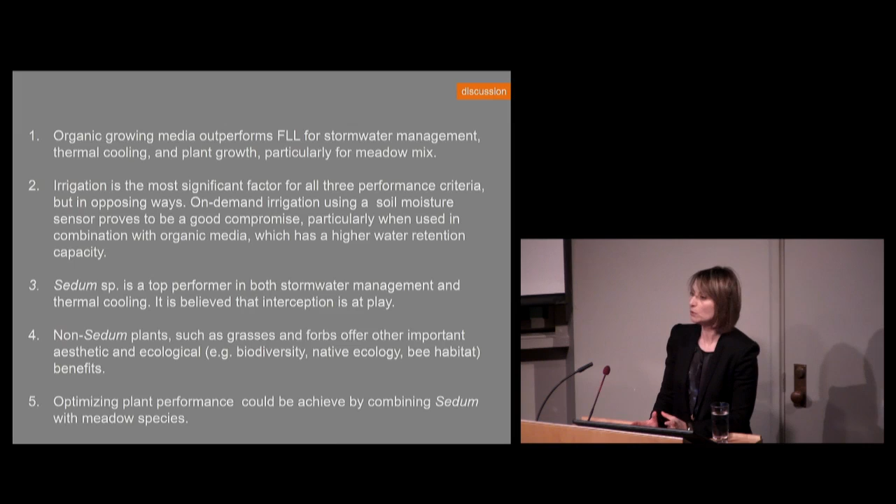And non-sedum plants such as grasses and forbs offer other important aesthetic and ecological benefits, and so should not be precluded from plant specification. And so optimizing plant performance could be achieved by actually combining sedum and meadow species. And on that note, a study that Scott MacIvor conducted at the GRIT Lab looked at the relationship between plant communities and pollinators, which are an incredibly important factor in biodiversity, food availability, agricultural pollination, and so on.

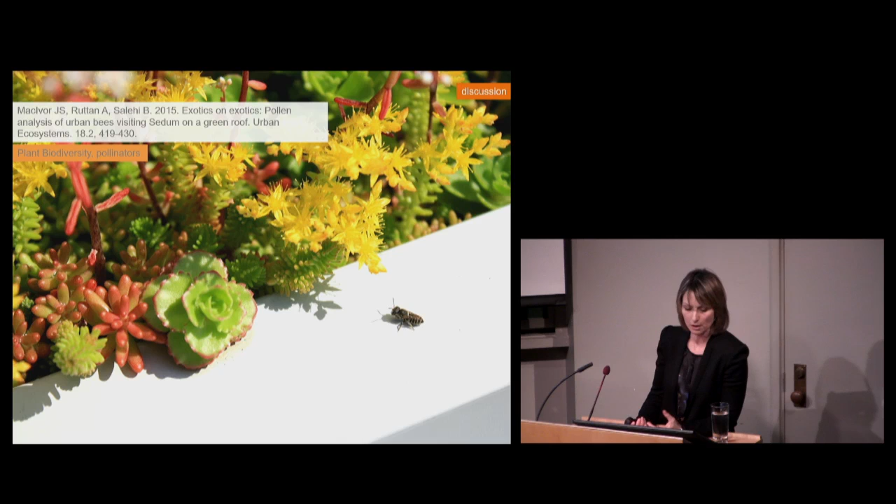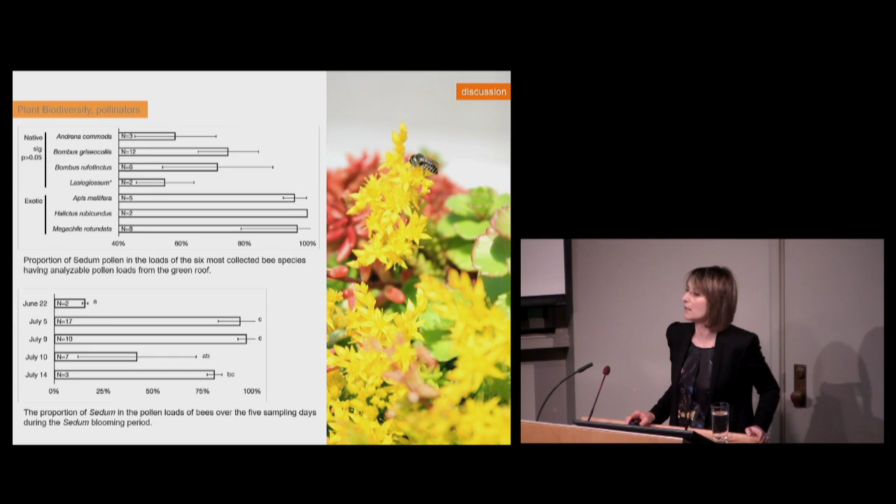In his study, he found that the proportion of sedum pollen in the pollen loads of foraging bees collected was high amongst all bees, averaging 80.5% of total pollen load, but significantly greater for exotic bees compared to native bees. Conversely, native bees had a significantly greater number of non-sedum pollen types, comprising more than 20% of their pollen loads, meaning these bees might be visiting flowers at ground level and on the roof in the same foraging bout.

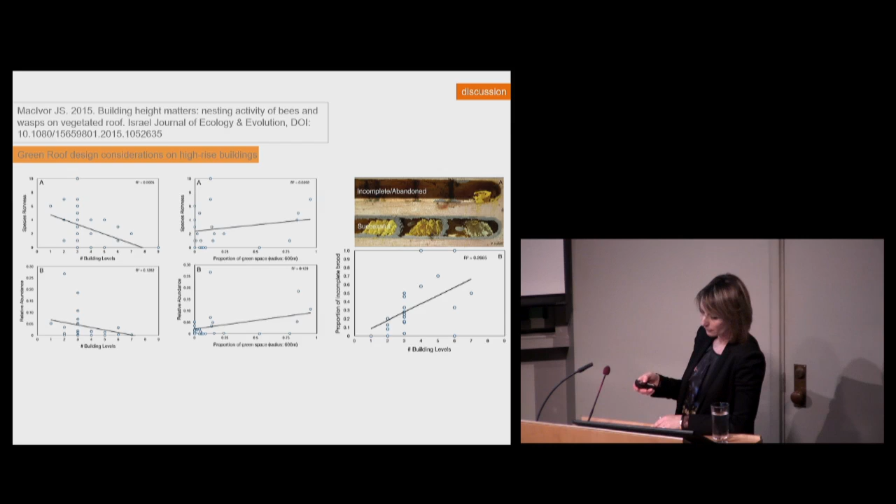Oops, what did I do here? Sorry about that. Oh, okay.

So the reason I bring these studies up is because most new construction nowadays in Toronto actually towers 20 stories and above. And so plant diversity, species, and species habitat may not be the top priority, while thermal cooling may also not be top priority because of high wind velocity, which would make any sort of microclimate condition essentially negligible. However, at these heights, perhaps stormwater management is prioritized over others.

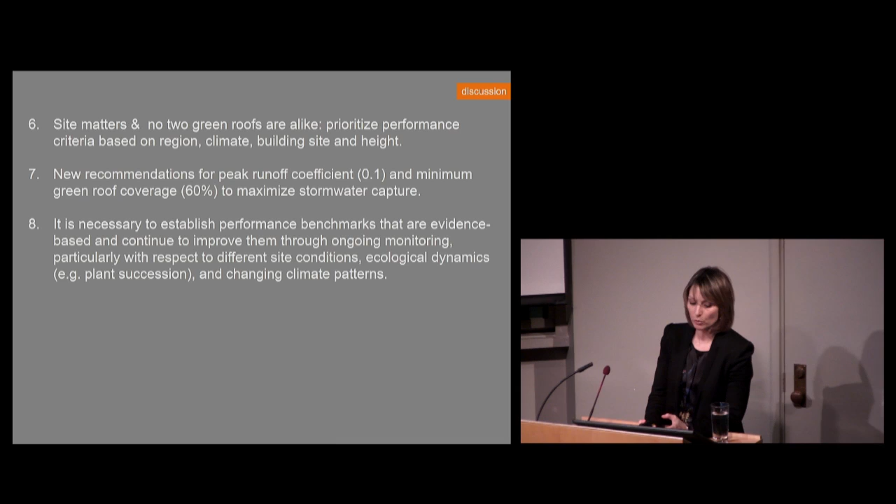That is simply to say that site matters, and that each green roof should really be prioritized according to geographic, local site conditions, and building type. What also comes out of the studies is that new recommendations for the peak runoff coefficient and minimum green roof coverage to maximize stormwater capture should be reevaluated in the City of Toronto Green Roof Bylaw and construction standard.

And finally, it is necessary to establish performance benchmarks that are evidence-based and continue to improve them through ongoing monitoring, particularly with respect to different site conditions, ecological dynamics such as plant succession, and changing climate patterns. And with that, I'll conclude my presentation and invite you to ask any questions or make suggestions. Thank you.

I have two questions. One is, what is the weight load difference between organic and the FLL growing media? And is there any empirical data on using on-demand irrigation using gray water? Two excellent questions. I don't have the answer to your first question. I can find that data, and I'll get that to you later. But load would definitely be one aspect that we would consider as a next study in terms of looking at the overall life cycle of the different configurations.